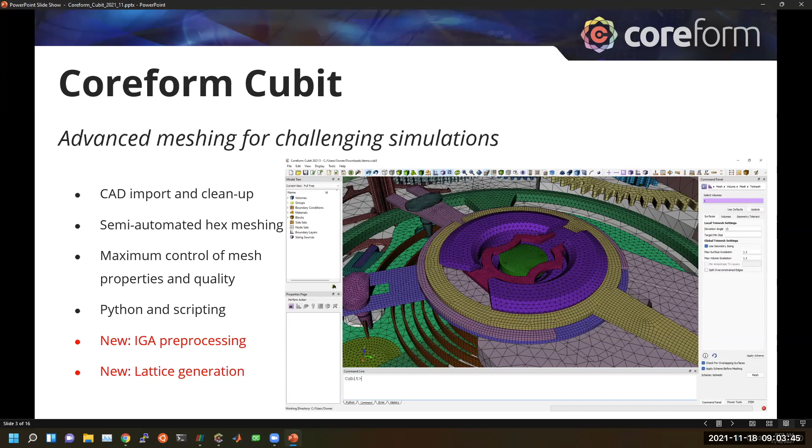All right. Thanks, Matt. Yeah, we're all very excited about this release. We've been working hard for 2 years, really, if not longer. I mean, many people at Coreform have been working much longer to get Cubit to where it's at today. So we're really excited about this release.

There's a lot of stuff we've done in this release, but a few of the big highlights we're going to talk about today is that we've begun to modernize our documentation for the web. And so you'll see that change. There's still maybe a few rough edges that you'll see. And so if you find rough edges, we'd love to hear about them so that we can fix them up. But we think you'll enjoy the new look and feel of our documentation.

We've also now officially released our patent pending U-splines technology, which is a novel spline technology for simulation. We've also released some initial capabilities to use U-splines for an IGA workflow. This allows you to use Coreform Cubit for ANSYS LS-DYNA simulations, as well as for our Coreform IGA solver for our partners who are testing out that solver for us.

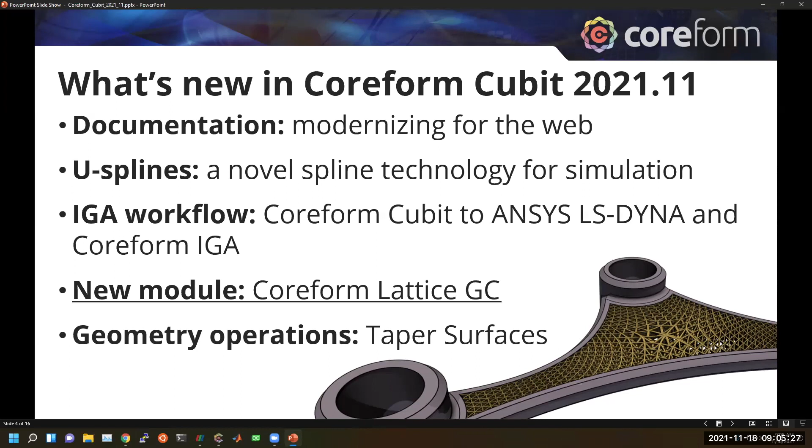As Matt mentioned, we also have a new module in Coreform Cubit called Coreform Lattice GC, the technology that we're excited about and we're showing in the bottom corner here. We've been working with one of our partners to commercialize this technology for building novel lattice structures for additive manufacturing. And lastly, we've got some new geometry modification capabilities in Cubit, one that a lot of our customers asked us for, the ability to taper surfaces. And so we'll demo that as well today.

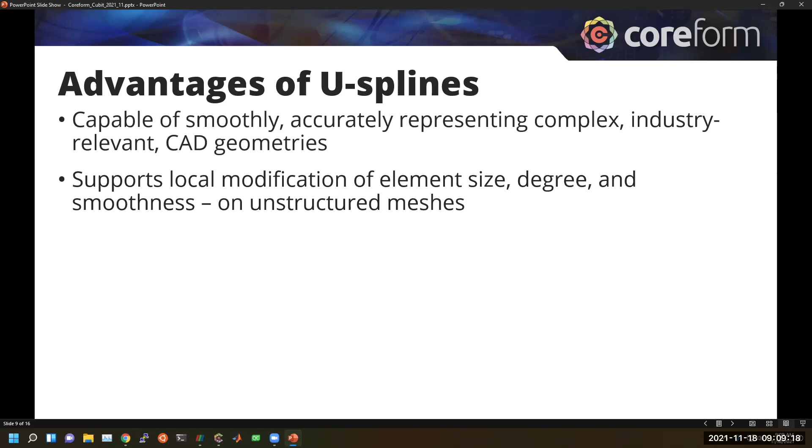U-splines support local modification of their element size, degree, and smoothness, again, on unstructured meshes. And they have a slew of other superior mathematical properties, which make them an ideal element formulation for simulations. And then we've used these mathematical properties to allow us to use U-splines as the basis for our revolutionary new simulation capabilities in Coreform IGA. So what I'd like to do now is demo building U-splines in Coreform Cubit for you.

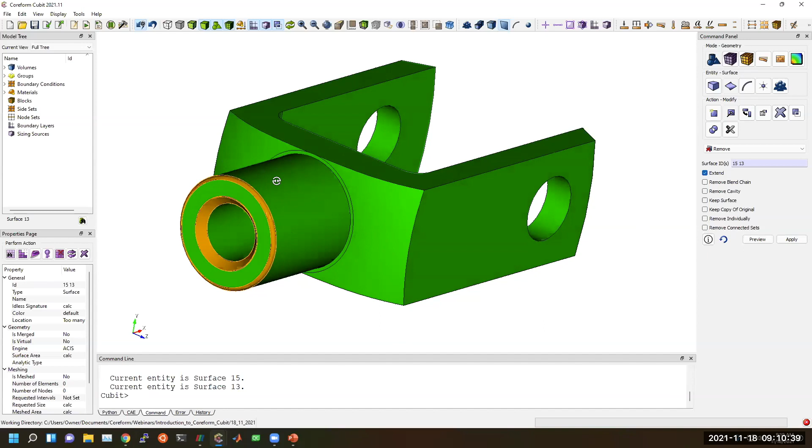So this is a CAD model of a knuckle geometry. I just want to show that we support traditional mesh workflows that, if you are an FEA practitioner, should be very familiar to you. So the first thing I'm going to do here, I'm going to build a body-fitted U-spline mesh, and I'm going to defeature my geometry to support that. Just to show that we support these traditional geometry modification techniques. So we can remove these chamfers from our model, as well as remove this additional fillet and chamfer at this top, which might result in elements that are too small that we don't want to have in our model.

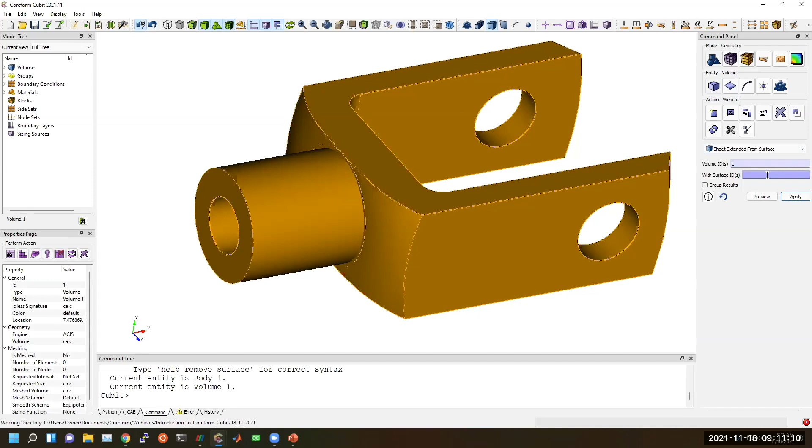We then can decompose our model to support building a hex mesh on top of. So I'm going to start by cutting off this top cylinder here. So I'm going to web cut. Web cut is, again, the term that we use for partitioning a geometry. I'm going to cut this geometry by extruding this sheet through the model. I'm then going to cut off the top by extruding this planar surface. That's now resulted in separate volumes.

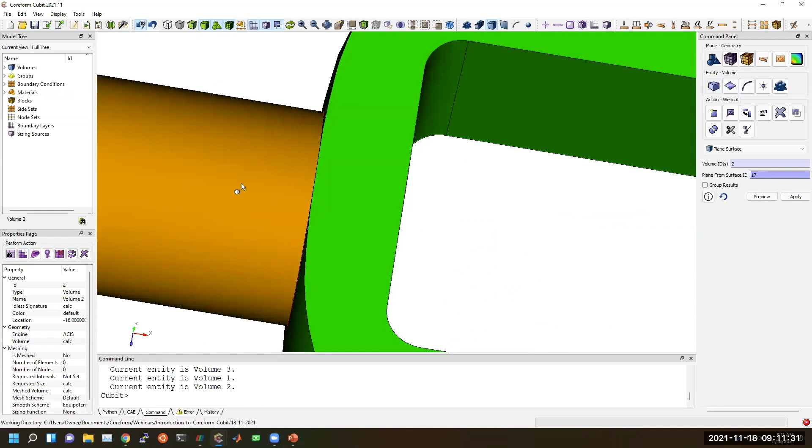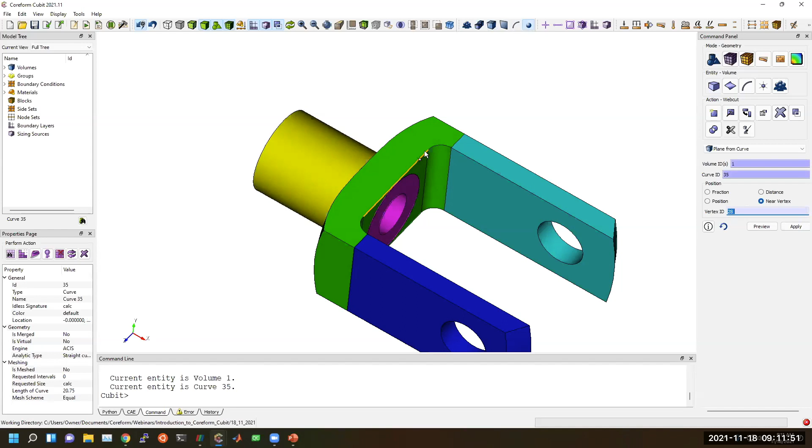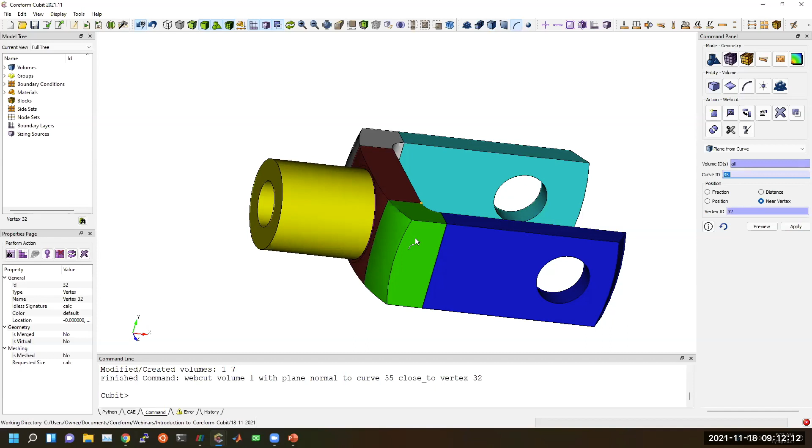Then let's go ahead and cut off these forks or these tongs from our model. And then let's cut off these shoulders. And lastly, we'll go ahead and subdivide into quarters. Take all of these volumes and we'll cut in half.

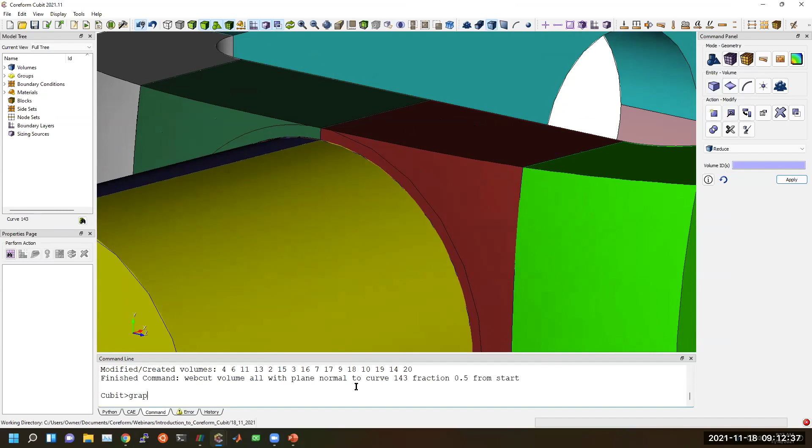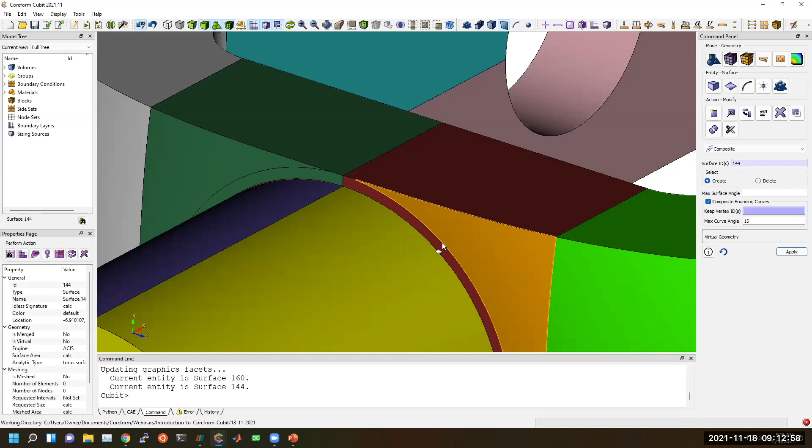And then lastly, we'll apply some virtual topology to remove this small surface here that comes into a tangent. So we'll use virtual topology; the operation is compositing surfaces or curves. So within the mode geometry surface modify composite, we'll select the target surfaces to composite.

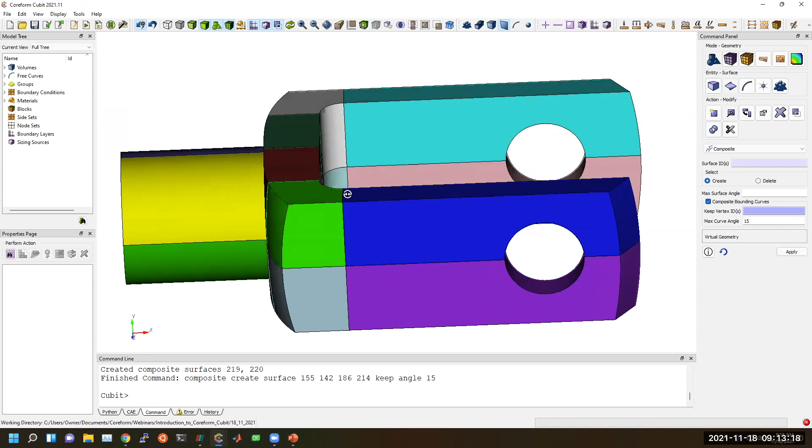And the last step we need to do is now reunite our geometry or merge the geometry so that we can build a conforming hex mesh. We'll imprint and merge all of our volumes together. So the next thing is, right now we support building U-splines on swept hex meshes. We'll soon be supporting all of our hex meshing schemes for building splines on. But for now, we're going to just define a sweep on everything. I think we'll do a size here of about 4 to give us a nice coarse mesh.

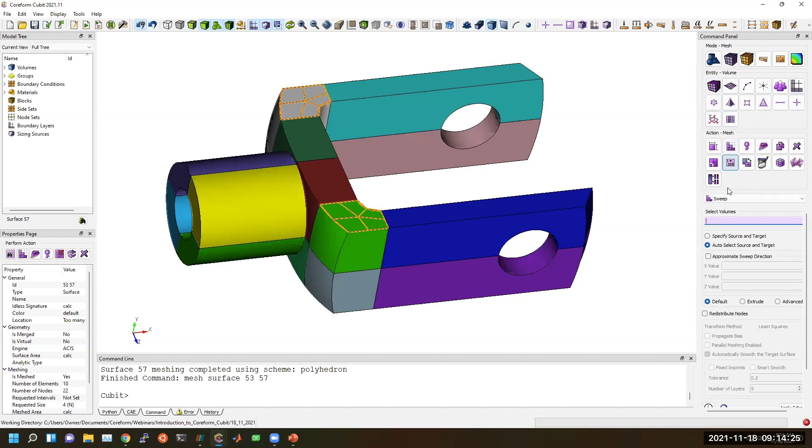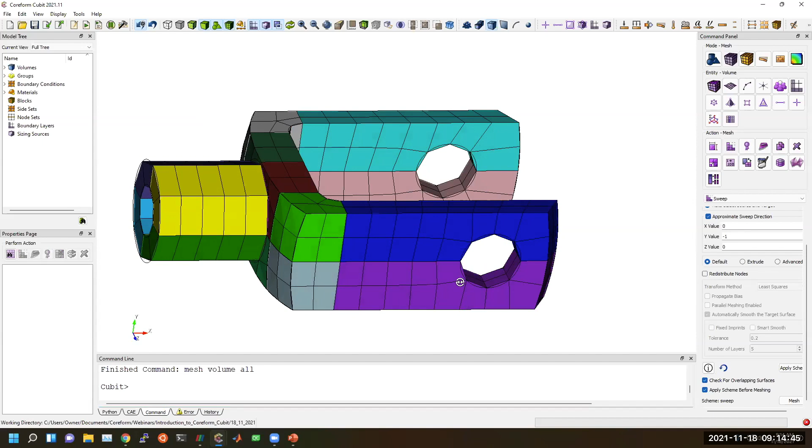And we'll also specify some special mesh schemes on these shoulders. So we're going to build a mesh that's about this level of coarseness. So now for these shoulders, we're going to specify a specific sweep direction as opposed to letting Cubit pick one. So we'll tell it we're going to sweep these in a negative Y direction, so sweep from top to bottom. So this is now representative of the coarseness of the model that we're going to build our U-spline on.

Right now our U-splines are supported through command line options. Whenever we do development in Cubit, we always start by developing the Cubit commands, and then we roll out GUI tool buttons for those. So what we're going to do is set the U-spline settings on all the volumes to be degree 2 with a max continuity of 1.

Right now we support up to cubic U-splines. You can try even higher order U-splines if you want, but right now we only have test suites up through cubics. So you may be able to build U-splines on higher orders, but you may encounter some inconsistencies with higher degrees. And then we're going to build this U-spline on all these volumes. So right now, Cubit is going through and building our U-spline basis. And then we'll fit this U-spline basis to our input geometry.

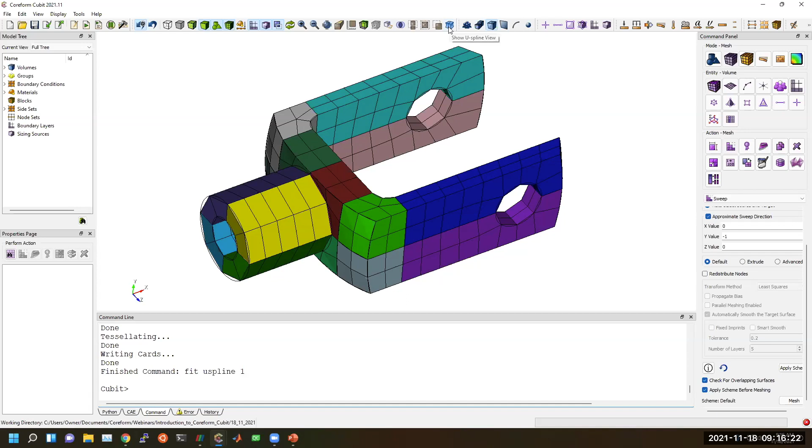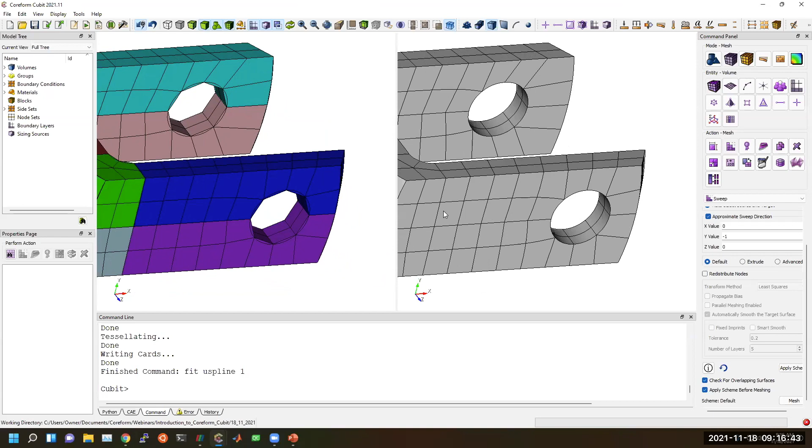And now we're rendering. You can then view the finished U-spline inside of Coreform Cubit through our U-spline view. And so as you can see, because we're using a higher order basis here, quadratics or degree 2, we get a really good fit to the input geometry, as well as, again, we've got smoothness in our bases across these element interfaces.

With this U-spline, we then support exporting this U-spline definition to several different formats, one being BEXT, which stands for Bezier extraction format, which is common in the simulation world to describe splines in an extracted form. And it's this format that you can use to export out to LS-DYNA or others. There are several open source codes that also support BEXT as inputs.

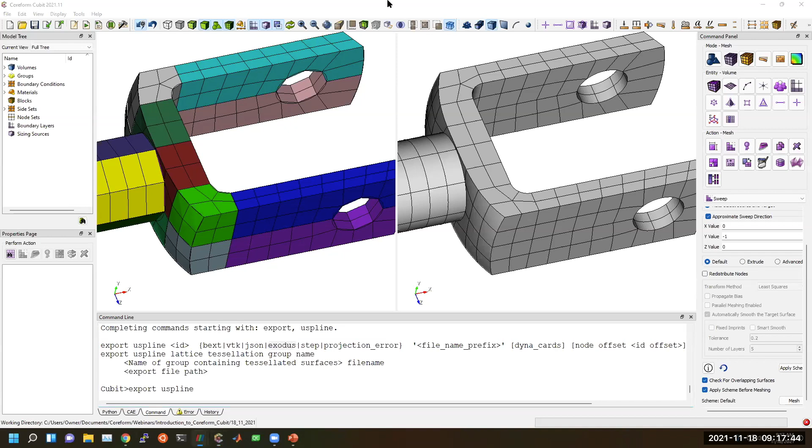If you want to visualize, you can also export to the Visualization Toolkit format, or VTK. And we're also working on developing additional formats as well, such as Exodus and STEP formats. And so you can then visualize this U-spline in ParaView through that VTK export format.

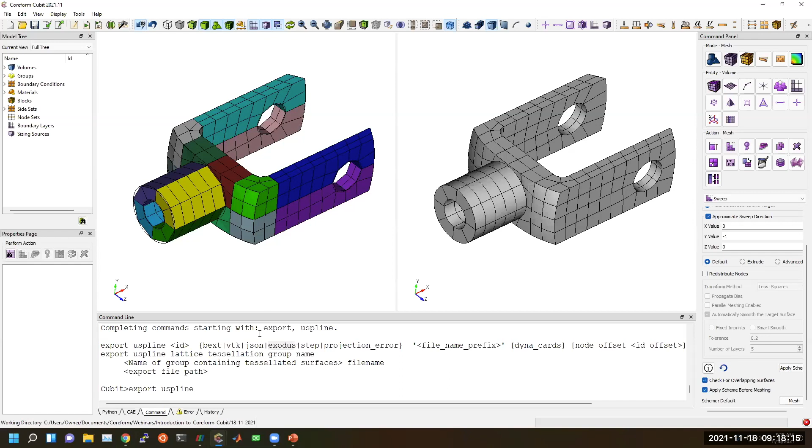So yeah, this is our new U-spline technology that's now finally in Coreform Cubit. So this is one of our first steps into making Coreform Cubit a general purpose IGA preprocessor.

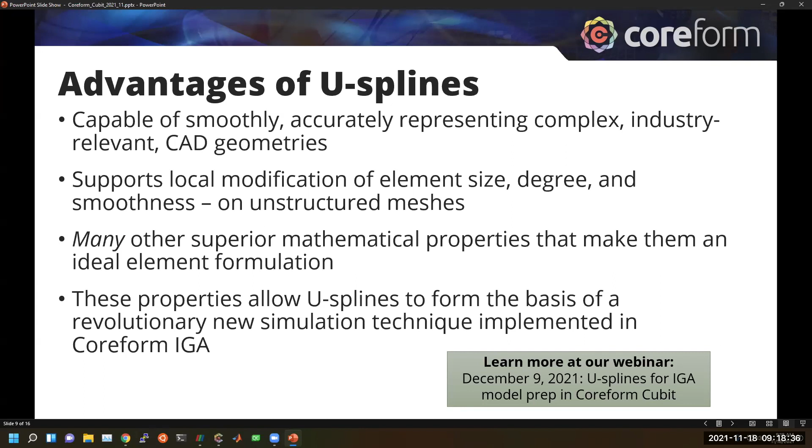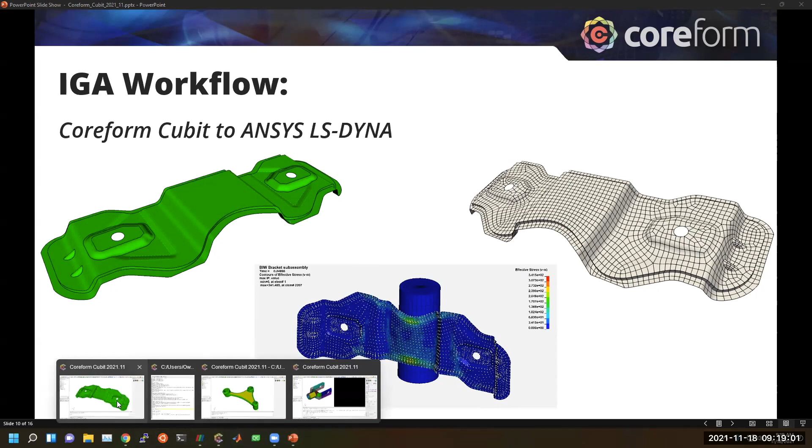I also talked about being able to build IGA workflows for Ansys LS-DYNA, again, using U-splines. And so I'll show a demo of this as well. As you can see, we can take a model geometry, build a U-spline, and then actually run it today in Ansys LS-DYNA. And so in this case, again, what I've done is I've taken a model geometry.

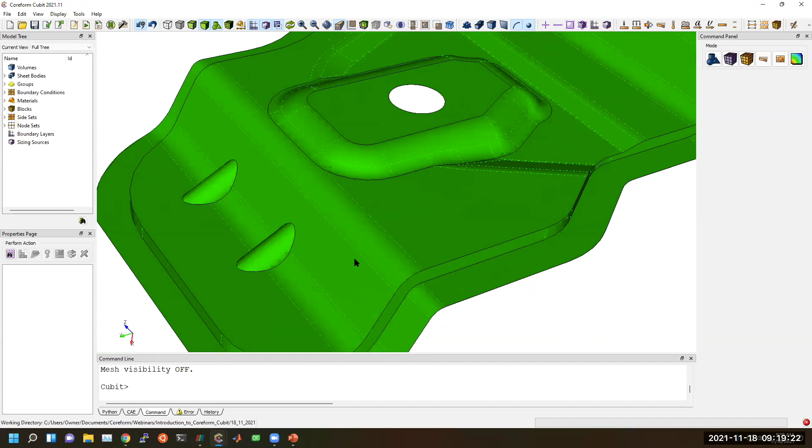I've used a traditional workflow prep to, again, apply compositing of all of these unnecessary CAD surfaces, or interfaces, that are really just artifacts of the CAD modeling process. I've segregated out my model so that I have a region to apply a boundary condition onto. So if I wanted to apply boundary conditions on these surfaces, I could. And then we build a quadratic basis, and then we throw this at a cylinder in Ansys LS-DYNA.

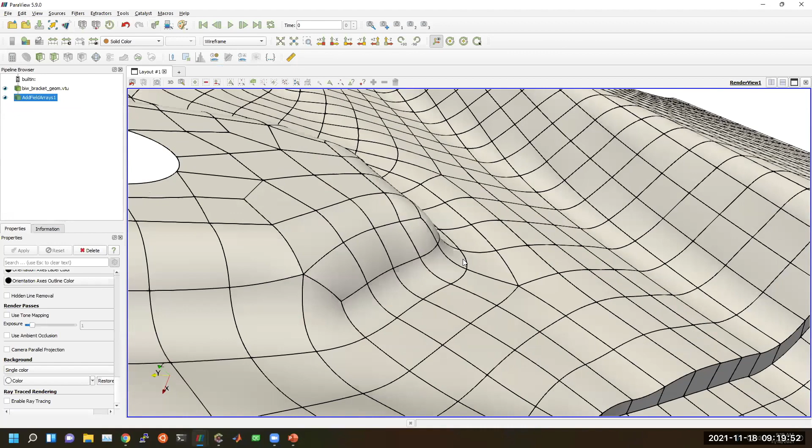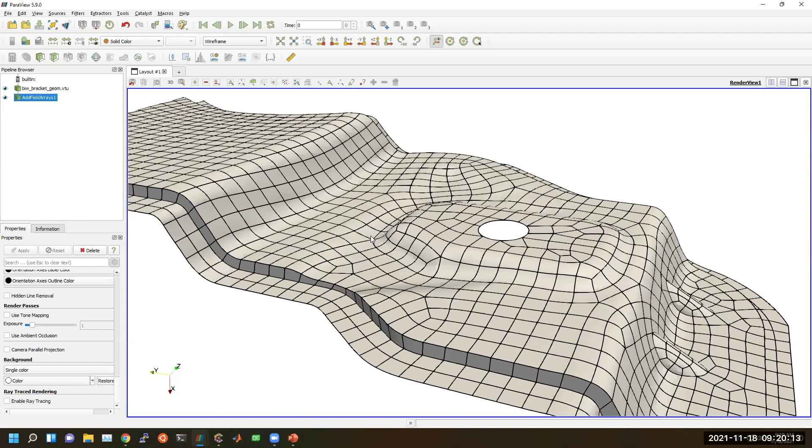Again, we can build the U-spline with a high order fit to that model geometry. And so as you can see, the U-spline with its smoothness and its higher order allows us to get accurate fits to the geometry, even while defeaturing a lot of those geometric surfaces or interfaces between those surfaces away. And so you can actually run these models in Ansys LS-DYNA, and I'll show you the results here.

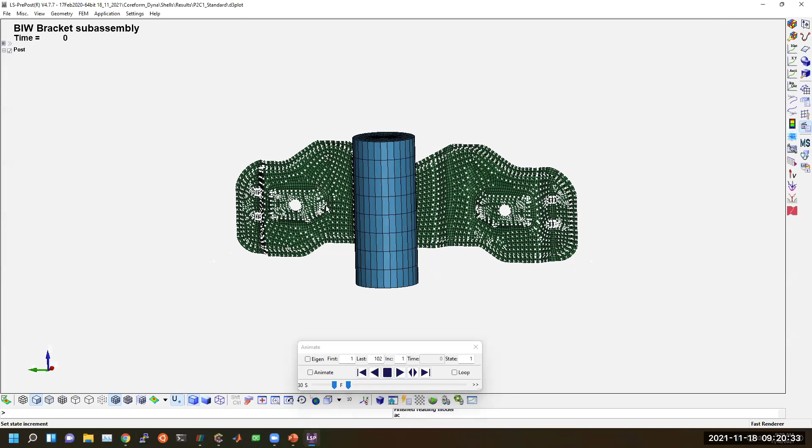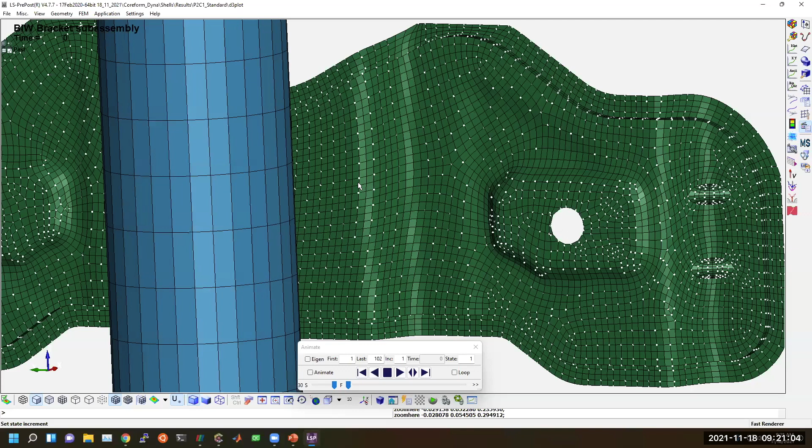One of the things to note, it's been asked a couple of times: right now, LS-PrePost visualizes the interpolation facets for this higher order basis. So actually, you're seeing about twice the density of what's actually going on in Ansys LS-DYNA. The white dots are actually the control points of the U-spline, which can be thought of as the corollary of nodes in traditional finite elements. So each control point corresponds to a single basis function.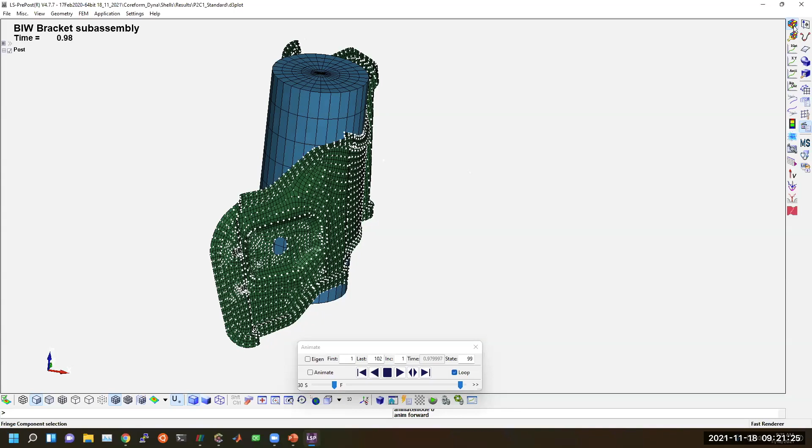And so again, we've got the sheet metal part, which we're going to throw at this cylinder. And we can put a fringe plot of, say, von Mises stress to view our von Mises stress throughout the simulation as well.

This is a capability that is still relatively new. We're working with our partners in the commercial space as well as at Ansys LS-DYNA to improve the functionality of the U-splines in their simulation tool. So we encourage you to try out this capability and then let us know what kinds of features and functionalities you need for your specific workflows so that we can work to get those capabilities working in LS-DYNA for you.

Also, as we mentioned, we're developing our own solver called Coreform IGA, and we can also build these IGA models using Coreform Cubit. And the unique thing about our Coreform IGA solver is it allows us to change the level of immersion so that we can build U-splines not on body-fitted models where you have to defeature in order to build a hex mesh, but rather relax the body fit constraints, maybe just slightly, so we have a simple to mesh geometry that still captures all of the geometric information of our model, while vastly reducing the amount of model prep time.

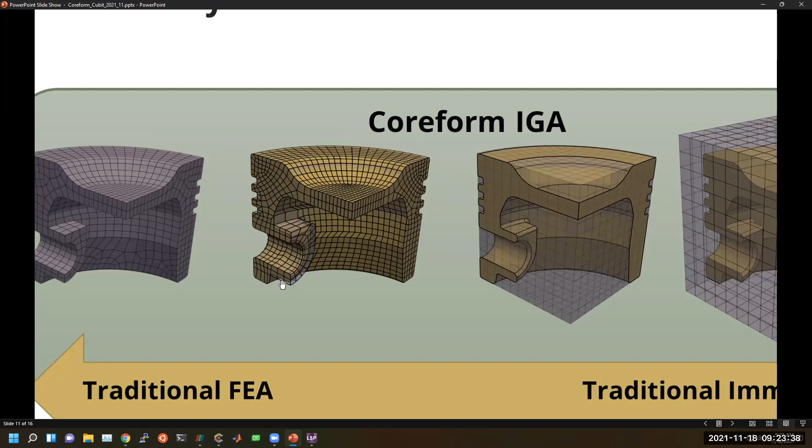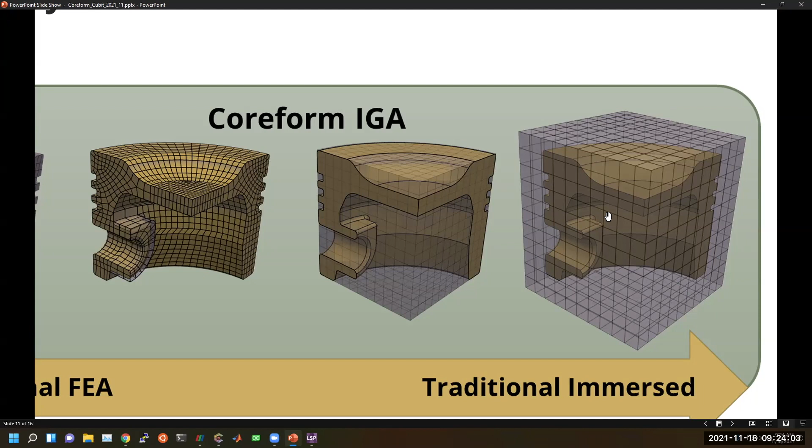On a critical component, just for efficiency of degrees of freedom per accuracy, you may want to use a mostly body fitted but slightly relaxed version. But in parts that are not necessarily important, far away from the area you care about, you can use lower levels of initial geometry capturing, still using local refinement of U-splines to drive accuracy to whatever level you need, just with lower accuracy per degree of freedom. In regions you don't need as much accuracy, these more immersed methods can be valuable.

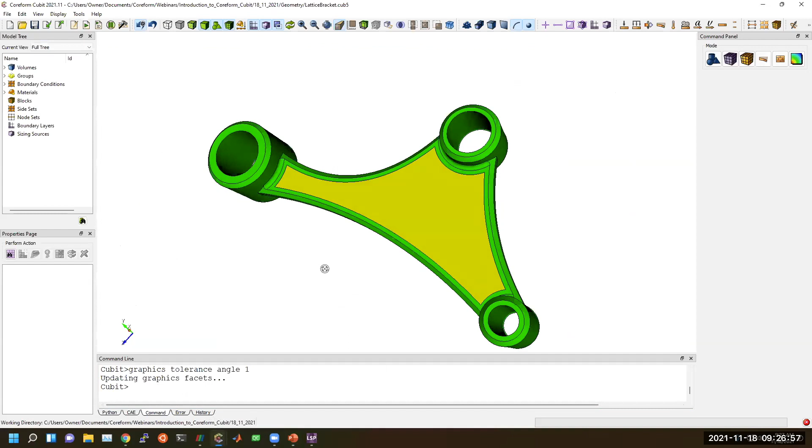Here's an example bracket model. What I've done is cut out a region that I'm going to turn into a lattice structure, and that's this yellow region here. I'm going to draw this yellow region.

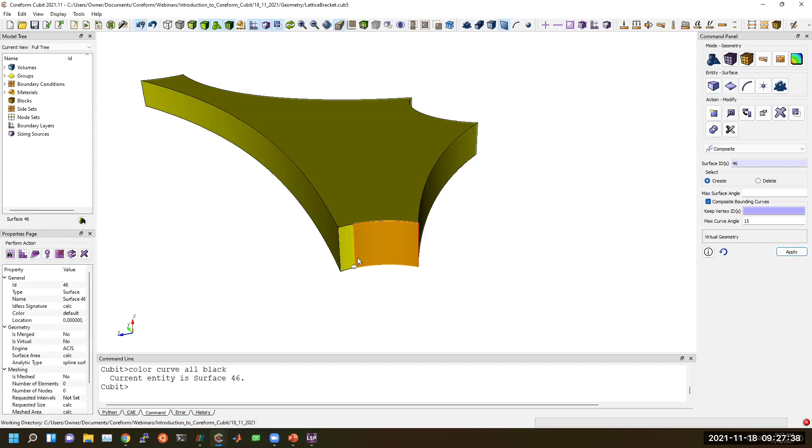I'm going to do a little bit of preparation, just like I would with traditional hex meshing. For instance, I want to composite these two faces together to remove this small face here, which might drive a small element. So I'll go into my geometry mode, surfaces, modify composite, and composite these surfaces together.

I'm then going to define a mesh on my surface, doing again a sweep here, so I create an initial polyhedron styled mesh. I'm going to then smooth this mesh so that I get a much better element layout, applying both a centroid area and a mean ratio. Then I'll define my sweep through the model.

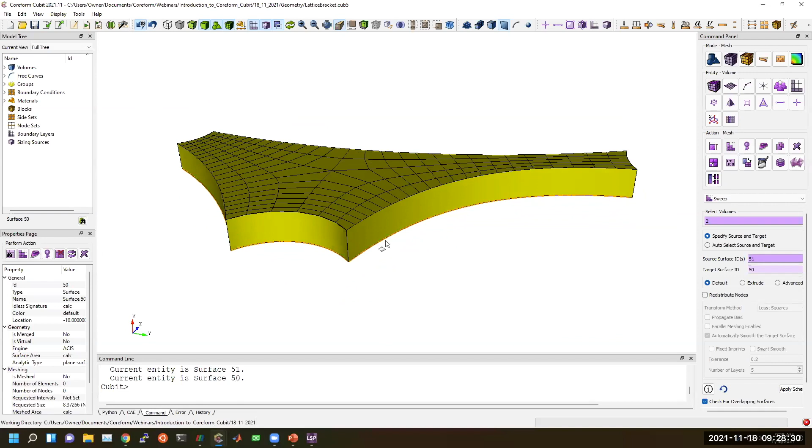Once I built this mesh, we do the same process as before, where we assign our U-spline properties. We'll set the U-spline on volume 2 to have degree 2 and continuity 1. You actually don't need to specify these - the default U-spline we build is degree 2, continuity 1, but just for completeness here, I'd like to show that to you.

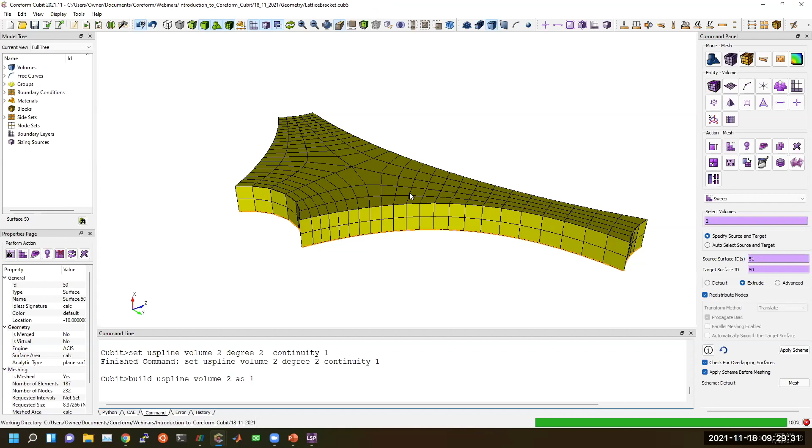Then we build U-spline on volume 2 with an ID of 1. Coreform Cubit will now build this U-spline basis, which will be degree 2 and smooth everywhere except exactly at the extraordinary point, where it'll only be continuous, but then smooth partway out these elements. So this is a maximally smooth U-spline. Then we fit this U-spline and redraw it.

And just as you can see from the U-spline basis, you can see the smoothness between these elements, and you'll see that the lattice structure will then inherit that smoothness.

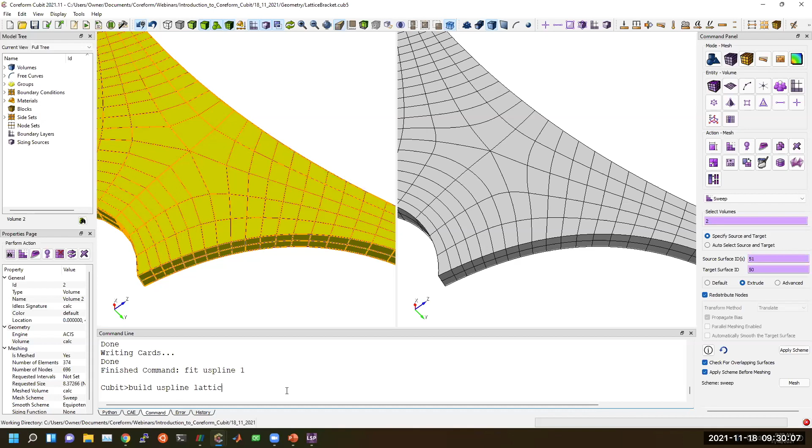We have commands to build a U-spline lattice. You can choose between one of four unit cells today, or there's even functionality to build your own unit cell and then incorporate that in your model.

We can automatically slice this model for 3D printing, and we can slice in parallel. We've shown massive speed ups compared to other softwares out there. We have many unit cells in our lattice, and you can export this model for visualization or for pulling into a 3D model somewhere else.

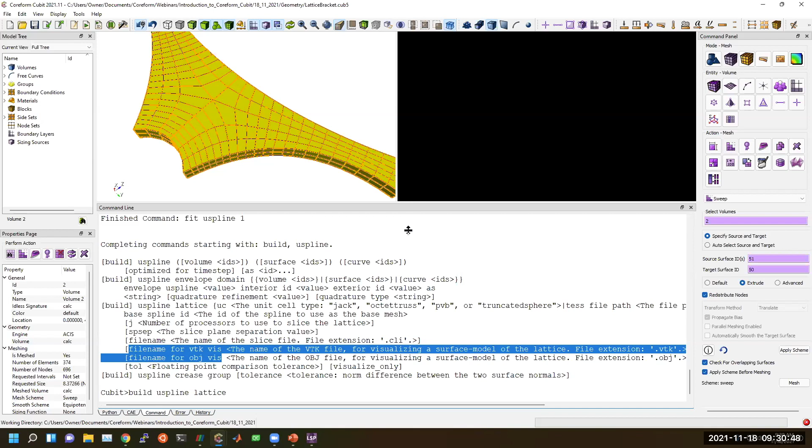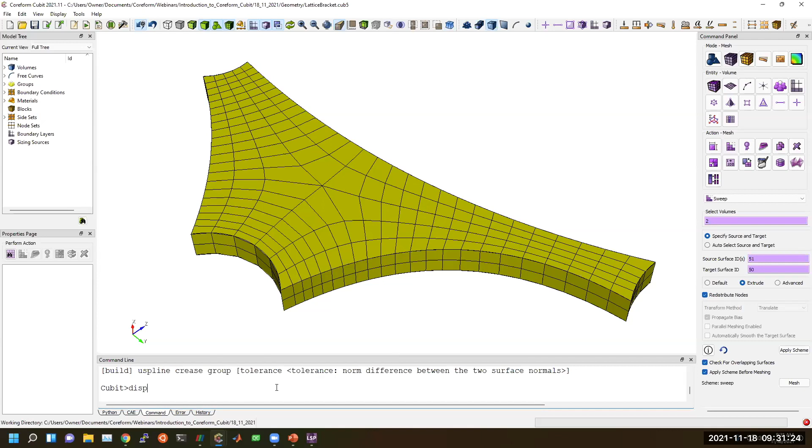What's unique about this representation is that you can use this background mesh within a model-based enterprise to define your lattice without having to render your lattice structure. It's a well-known phenomenon that pulling hundreds of thousands of unit cells into a CAD modeling tool when stored as an STL format can crash your CAD modeler. So instead we can incorporate these meshes within a model-based enterprise, representing your lattice structure with much fewer hardware requirements.

I've also pre-rendered some of these lattice structures for us here, again in ParaView. So we've got our background mesh. Just to show how these elements lay out, we can turn this on. This is a Jack unit cell. We're also working on implicit unit cells as well.

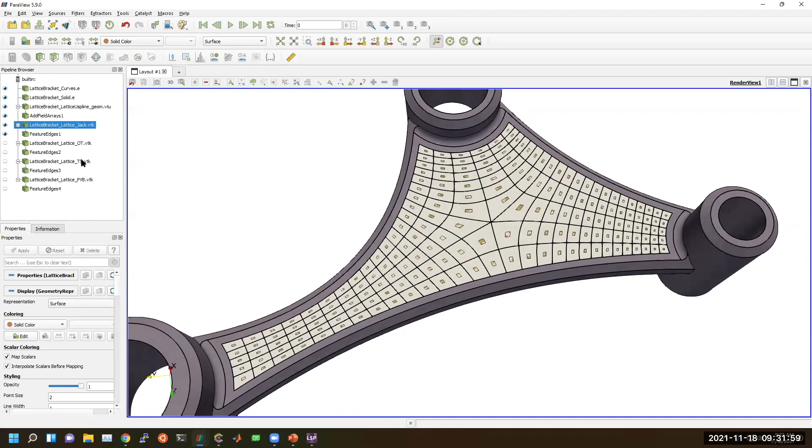You can see this lattice, or this jack layout, with smoothly varying unit cells. This is defined as a surface, but we also have unit cells we're working on that are defined as curves with a defined profile size.

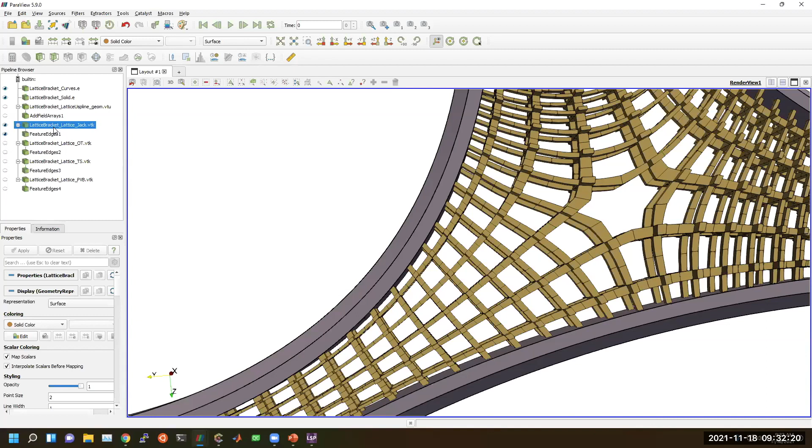So we have jack, we have an octet truss unit cell, as well as this truncated sphere, which is a bending dominated unit cell that may be desirable for certain applications. And then another unit cell called PVB, which is a self-supporting unit cell for additive manufacturing. And it finishes loading up.

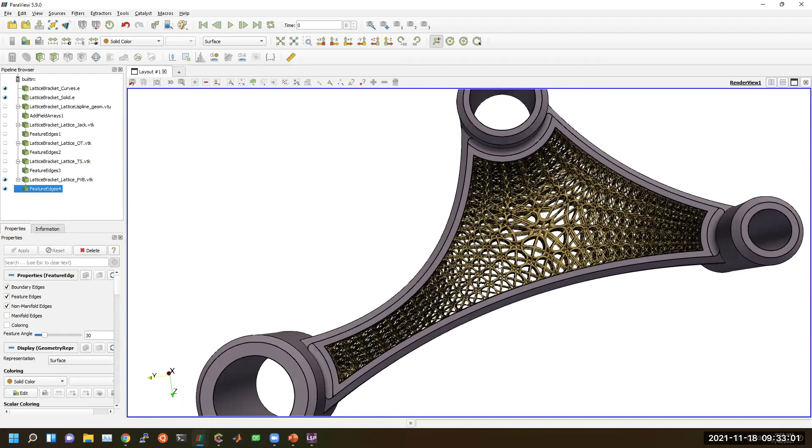So I hope you enjoyed this introduction to Coreform Lattice GC. We're excited to work with you if you have interest in using Coreform Lattice GC in your products, and we'd love to hear your feedback and experiences using this new module.

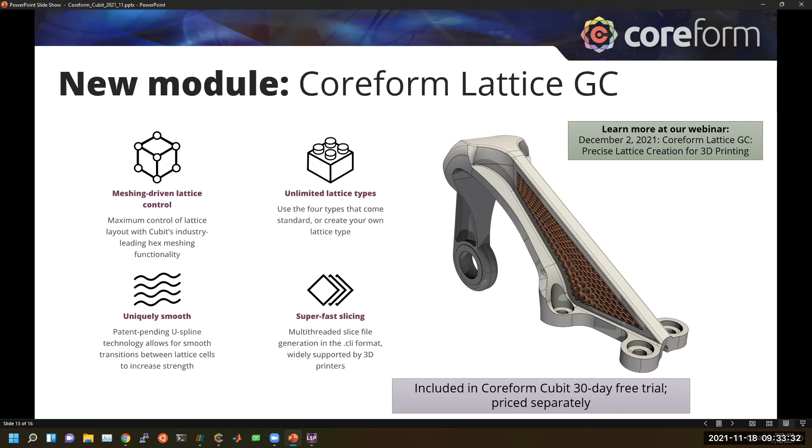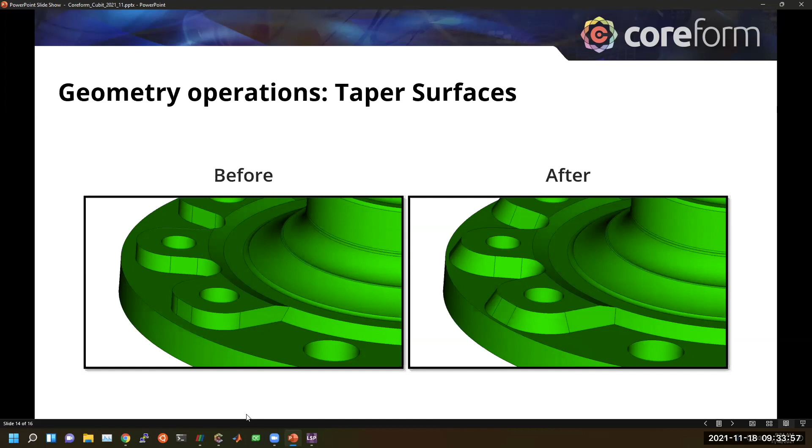The last thing I want to talk about is the new geometry operation in Coreform Cubit that we've added called taper surfaces. At a high level, this allows the user to select surfaces and then taper them at a certain angle from another plane. This is something quite a few customers have asked us for, so we've now exposed this functionality in Coreform Cubit. I'd like to give you a demonstration of this workflow as well.

So let me open this model. To apply this operation, let me just do one thing real quick. We'll go into the geometry mode, then modify surface, and on the drop down we're going to pick this taper option.

We can select surfaces. Another useful user experience improvement is that now whenever you select a surface, you'll always have this context menu, which allows you to select multiple surfaces in a specific manner. You can select similar surfaces, or select a cavity, or select continuous surfaces, which will then select this entire ring of surfaces we want to taper.

We then tell it the degree or angle we want to taper with, so maybe 30 degrees. And then we define either a plane, from a plane surface, about a curve, or some vertices. So here we'll pick a surface normal, normal to surface, and I think we want this bottom surface here.

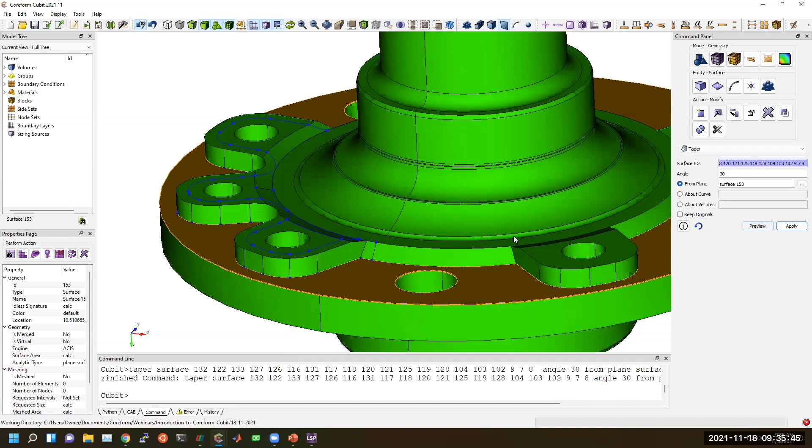We can then preview this taper. You can see I've got this taper to taper this surface inwards. So if we apply this taper here, you can see that we've tapered this model inwards.

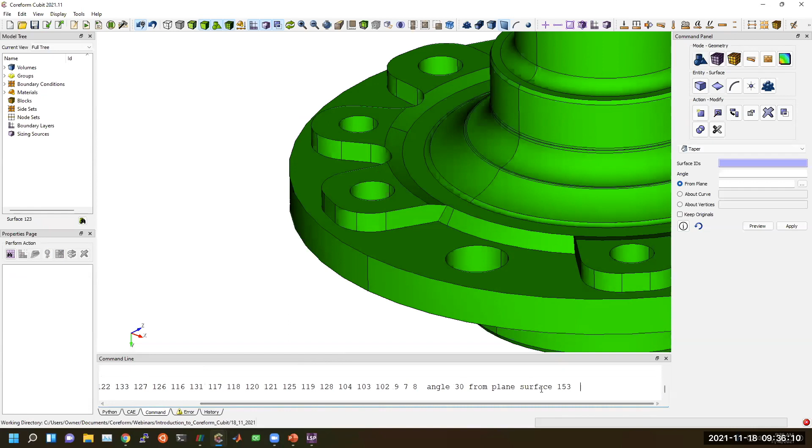Or we could choose a different surface to taper around. So instead of surface 153, if we want to taper around 123, and taper the other direction.

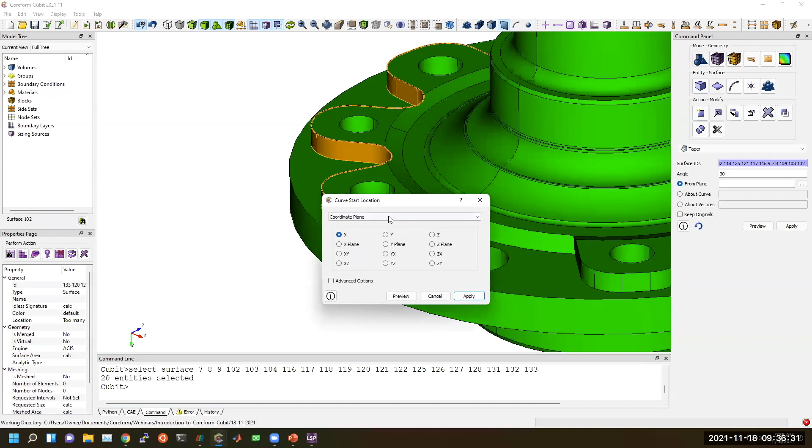I'll just show that again in the GUI so you can see it a bit more clearly. So I'll select continuous, 30 degrees, normal to surface 153 or 123, and look at what this taper will look like for us. You can preview this taper and make sure it's doing what you want before you apply it.

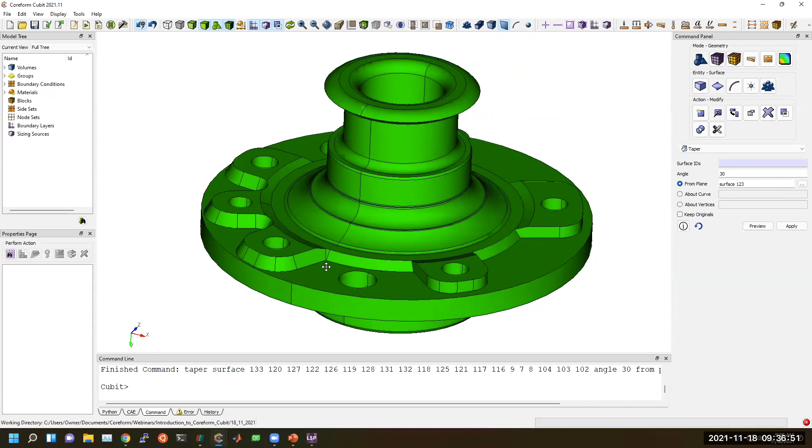All right, so that wraps up the main new features in Coreform Cubit. I'd encourage all of you to go to our website and look at the user manual for more detailed information on new release features, as well as more information about all the tools you've seen today.

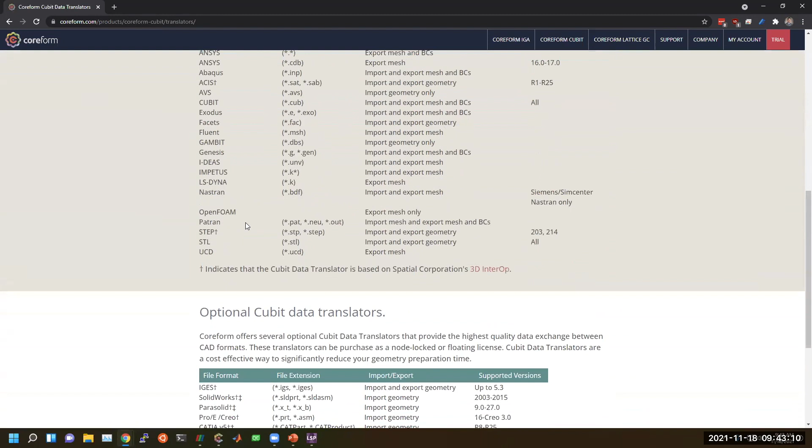We have these Cubit translators, and through those we support a number of different input formats, including SolidWorks, NX files, CATIA files, and others. If there are other formats you are interested in having support for, we'd love to hear. You can also import STL files and PLY and OBJ files, so even a number of these mesh-based formats are supported as well.

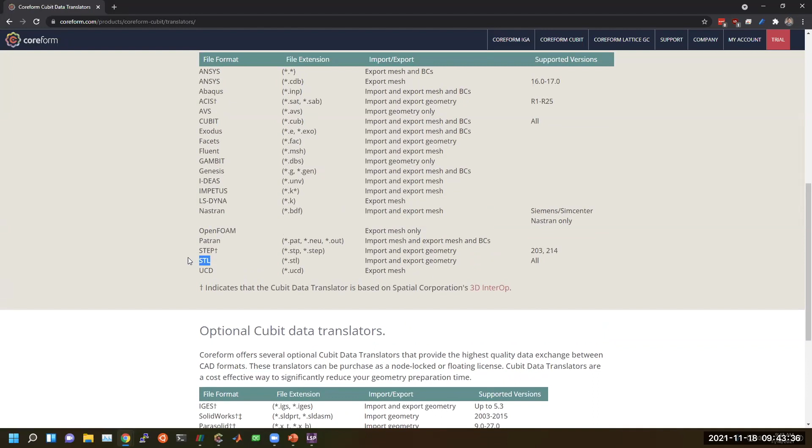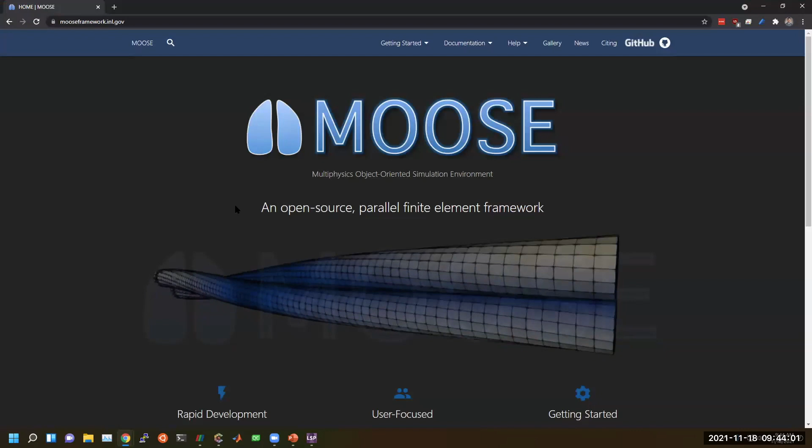Question from Anthony: how far along is the integration of Coreform with Moose? Moose, if you're unfamiliar, is an open source solver used a lot in the nuclear energy industry. I've been working with that team for a while, and I'm glad you asked. Just in the last couple of weeks, we've completed our first integration there. We're in the process of testing that with that team, so we'll have more news shortly on that, and probably have a webinar soon showing that workflow.

From Huang: is there any place I can find the documentation for the BEXT format? That's a great question. The BEXT format, when it originally came out, was parts of some dissertation papers. We should have this in here, and so it's never been necessarily well defined. But we do have some definitions in our manual that, if we've not yet released these in the documentation, will be coming shortly. We define the format for BEXT in our documentation. If that's not online, we can get that up there within a day or two. We're having some formatting issues with that, so I know that if it didn't quite make it, it'll be up there soon. Great question, we'll maybe send out an email to folks once we've made sure that's online.

Question from Ben: does Coreform IGA support dynamic simulations like vibration analysis, linear wave propagation? We fully intend for Coreform IGA to be a fully featured linear and nonlinear solver for both solid mechanics as well as heat transfer, coupled mechanics, and included in there are dynamics. We don't yet have an eigenvalue solver that's accessible to users, but our linear solvers right now are based in PETSc, and so we have access to some eigenvalue solvers in there. But we do support explicit dynamics already as well. So right now we've got implicit dynamic, explicit dynamic, and we're working on these other kinds of solvers. But if you have specific techniques you're looking for, we'd love to hear about which techniques are important for you.

Okay, question from Sumit: how can we extract the control point data from the created geometry in a data file so we can post-process the data in IGA? So, question for post-processing. One of the things I'll mention is that we do have a format that we're working on developing, which is the JSON format.

And in this JSON format is where you'll find information about the control point location as well as the extraction operations, I believe. So I think that's where you'll want to look. Also, we're working to, as we've talked about before, implement some of this inside of Exodus. And you should be able to recover the control points from there as well.

There's some documentation that we'll be publishing with the Exodus team. Exodus is an open source mesh format developed at Sandia National Laboratories, and we'll be defining that format in the coming weeks with some docs there. But I think that's where you pull that out. Yeah, the preferred post-process right now is ParaView, because we've added support for IGA there. And is that available in the standard ParaView download, Greg?

Yeah, so the way that we render U-splines here is, in ParaView 5, I think it's at least 5.8, but certainly in 5.9 or newer, they have an unstructured cell type, which allows us to render Bezier elements, which are what each of these are. These are each the Bezier cells natively in ParaView, and the control points are in this format.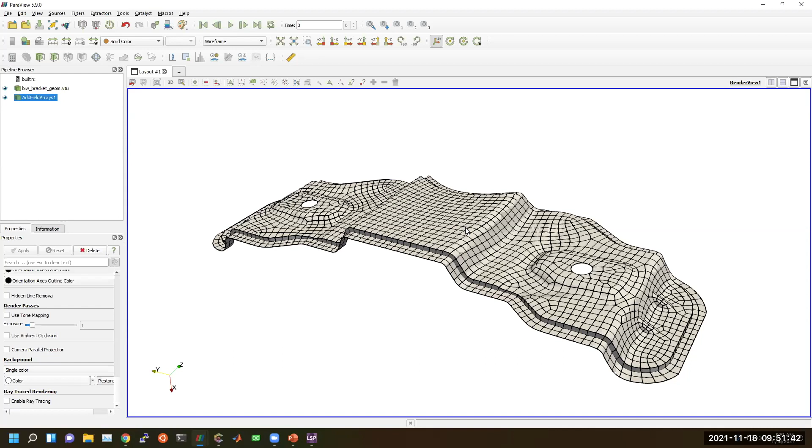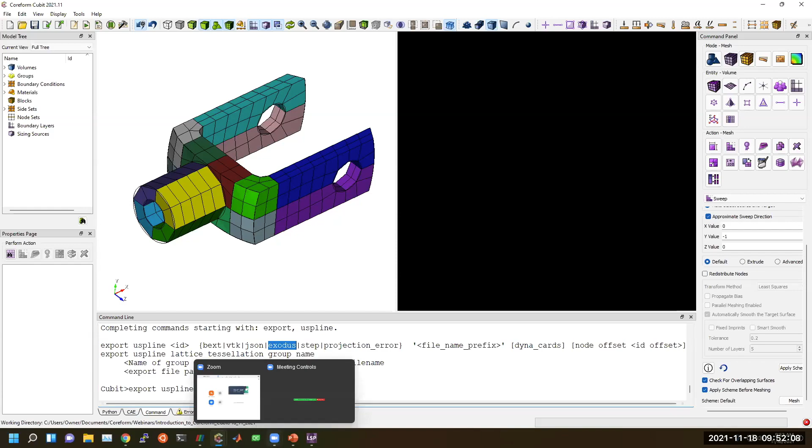And finally, a question from Christos about the new way that we're doing Cubit Learn licenses. Yes, because if the Learn license needs to be approved because it doesn't appear in my licenses after it's been requested, and maybe we can clear up some of the documentation on this, but once you request the Cubit Learn license, it won't actually show up anywhere. You just log into Coreform Cubit, click Educational, and then just add your username and password.

And that is the way that the license is working now. So there's nothing new. There's not a license that you'll be adding there. Yep. It just checks to make sure that they have an account on Coreform's website. Yep. So, okay, we got one more question from Clint. Can you mesh a shell in Cubit and fit a U-spline to it to use in LS-DYNA?

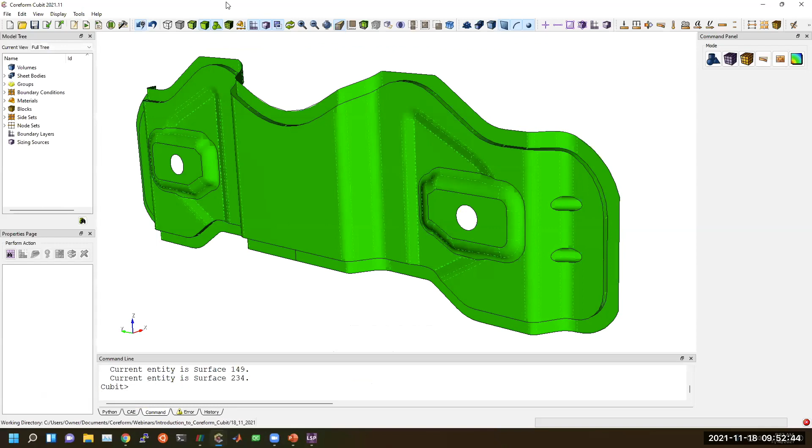Yeah, and actually, that's what we showed earlier. Building a surface mesh on this shell and building a U-spline on it. I think I've already built this U-spline. And then exporting out to an LS-DYNA file. And so it comes through as a .k. And we have a workflow described in our documentation.

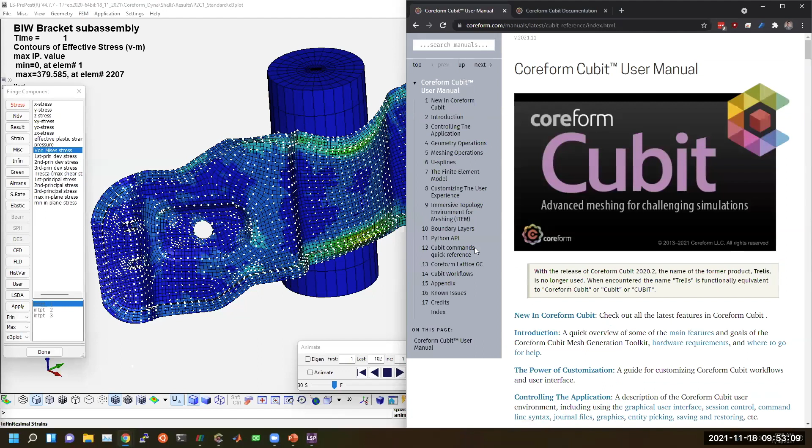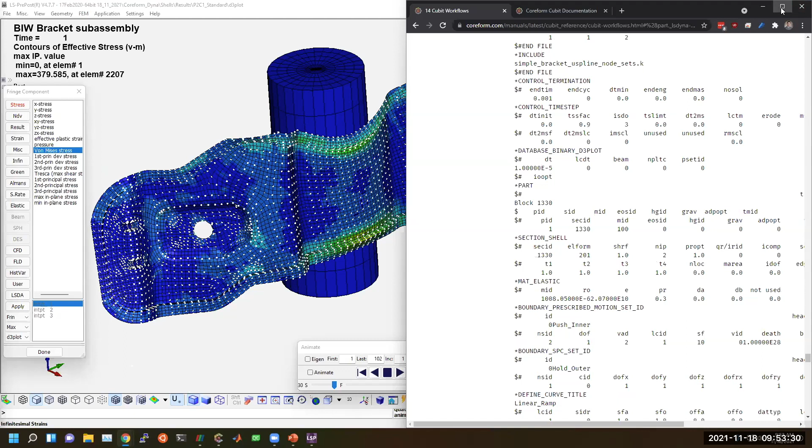So if you go to our documentation from the top level to Cubit workflows, you'll then find this section for building U-spline meshes and what's needed to create your .k file. So we have some information about how you include those formats in your .k file, as well as kind of an initial set of keywords that are supported by this IGA functionality.

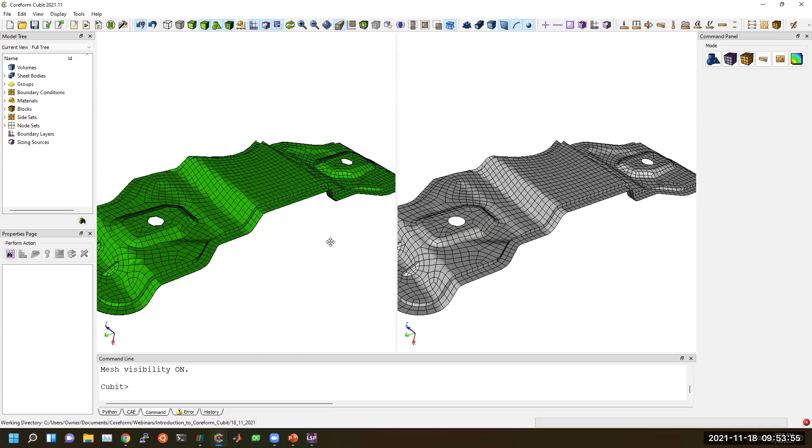Great. So another question, is it possible to decompose the whole piece without all of this process? I'm assuming that's referring to how we are setting up U-spline models today. So one answer to that is Greg shared a webinar a few months ago showing the Flex IGA process, where we can get away with much less model prep. And that is, I think, one of the big benefits of IGA,

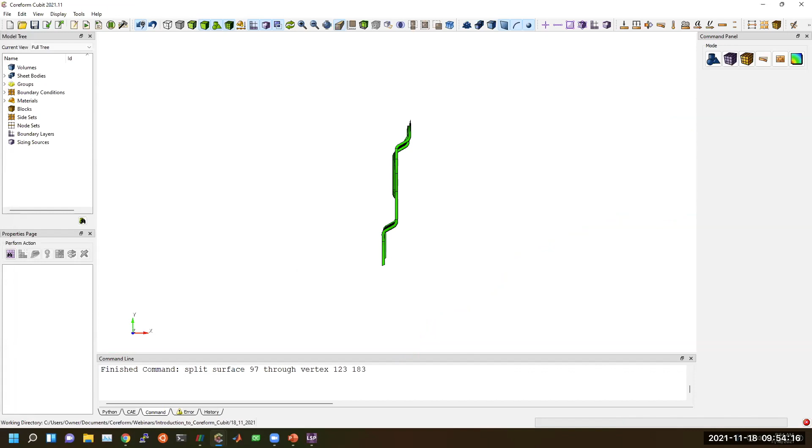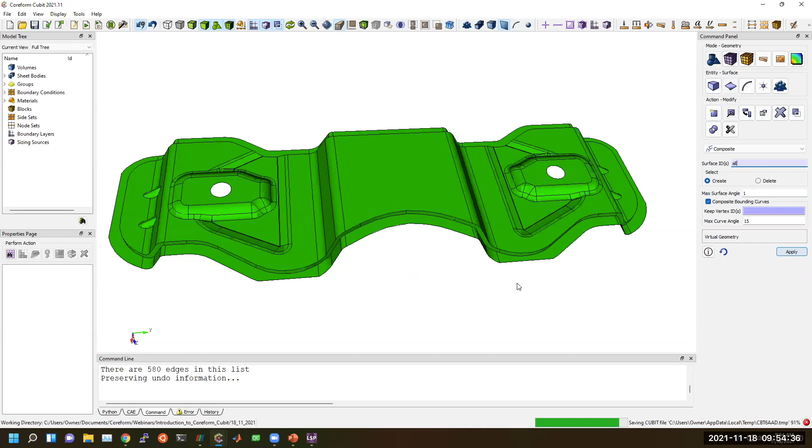being able to get away with far less model preparation. What we're showing today is a way of using existing traditional techniques to create U-splines for inclusion in Coreform IGA and DYNA. But absolutely, there are other ways that this can be done as well. Yep. And so our vision is that we'd like to be able to have essentially a single click to have prepared your region for meshing, and then just simply mesh the geometry, with effectively minimal or no user input.

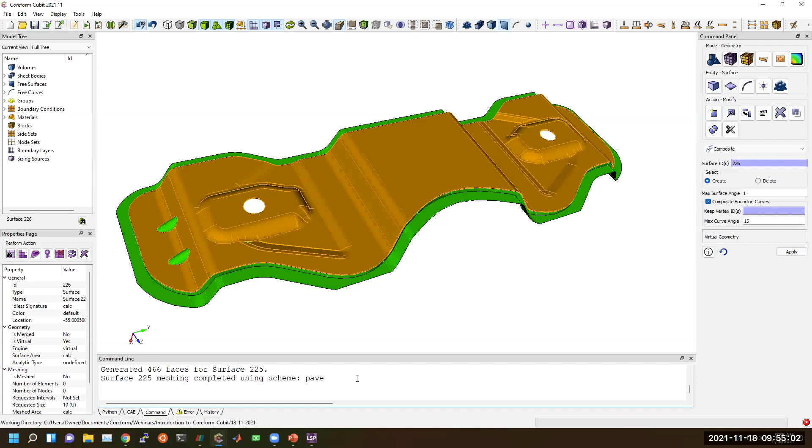I guess I need to tell it a size though. As our model prep. So we are very much focused on workflow and trying to improve the workflow for end users to minimize challenges here. So this would already be in this model I built here for LS-DYNA, where all I need is a contact surface. This would be ready to go in LS-DYNA.